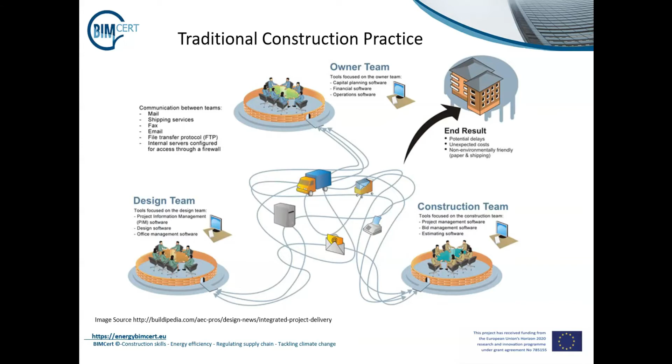This can result in data loss as well as poor communication, and this data may never be recovered again.

Also, through the use of different softwares, there are interoperability concerns, which means that one software may not be able to process another software's capabilities, and therefore there is important data loss in the exchange of these softwares.

Data interoperability addresses the ability of systems and services to create, exchange, and consume data. There is a need for clear expectations for the contents, context, and meaning of that data. The National Institute of Standards and Technology suggests that inadequate interoperability of buildings has resulted in $15.8 billion annual costs within the US.

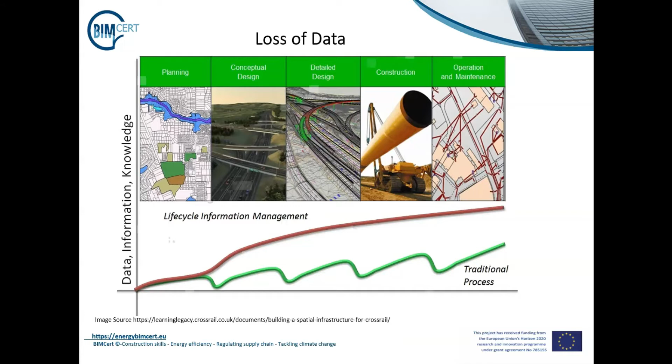So just to recap, some of the common concerns with the traditional construction process include adversarial and fragmented processes. This is a result of different stakeholders working to deliver their part of the project, and they may not be aware of other deliverables and data associated with those deliverables. Due to variations and cost overruns, it may create an adversarial and fragmented environment.

Little time spent at the design development. Due to the expense associated with the design, it can be difficult to explore variations due to the cost to do so. Poor site construction planning. It can be difficult to plan activities on site through 2D drawings, and therefore sometimes design intent is not fully understood, as well as little time spent in energy assessment or impact.

The use of sophisticated energy analysis tools would not be common during the traditional process, as a number of variables are required, such as materials and orientation, in order to fully understand how energy analysis can play a key role. This is where building information modeling can play a key role, as the model itself can be used to advance this process.

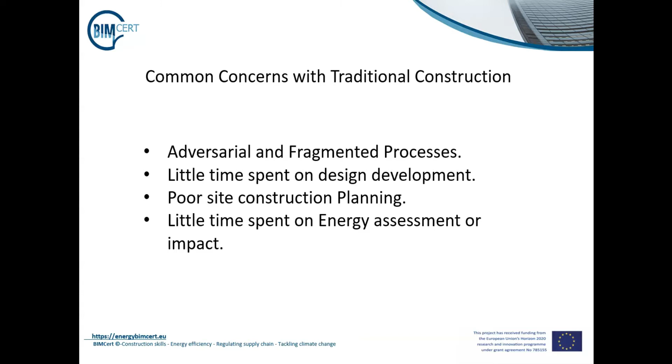An interesting fact is that any improvement in productivity and successful adoption of modern innovative processes will have a major impact. For example, a 1% rise in productivity worldwide could save $100 billion a year, according to the World Economic Forum.

So if we look at this from a smaller scale, by using innovative processes such as BIM, augmented reality, virtual reality, modular construction, amongst others, on a school project worth $2.5 million, we could easily save $25,000 by applying these innovative products.

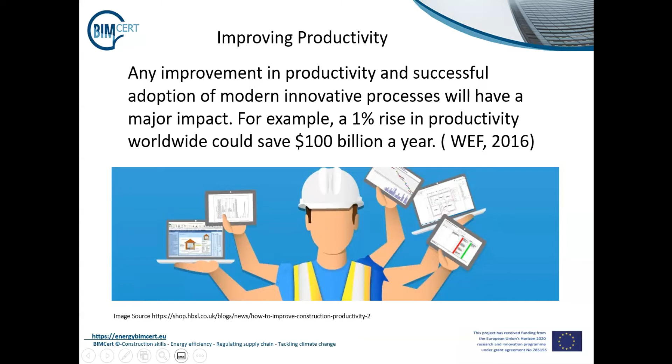As we have highlighted, there are a number of concerns with the traditional construction process. So what we will do is we will look at these in more detail, and importantly, we will examine how building information modelling can be used to address a number of these concerns.

First concern is adversarial and fragmented process. The construction industry is often described as being adversarial. That is, it frequently involves conflict, opposition, confrontation, dispute, and sometimes even hostility.

So how can BIM help with this? Well, BIM technologies can foster a more rewarding collaboration process, as the design team can work from a synchronized model within a common data environment in the sharing and recording of information. Markups can be performed online, and design changes can be implemented faster.

BIM not only allows design and construction teams to work more efficiently, but allows them to capture the data they create during this process, which can be used to inform operations and maintenance activities. This information provides a historical database for the asset, which can be used to inform the client's facilities management team.

BIM can also be used for clash avoidance. Potential issues can be highlighted before they happen on site, therefore removing potential confrontation. Access to a common data environment through the cloud will also mean that the team can have access to real-time information.

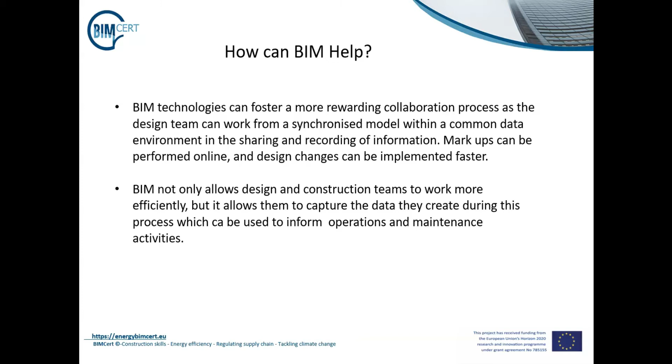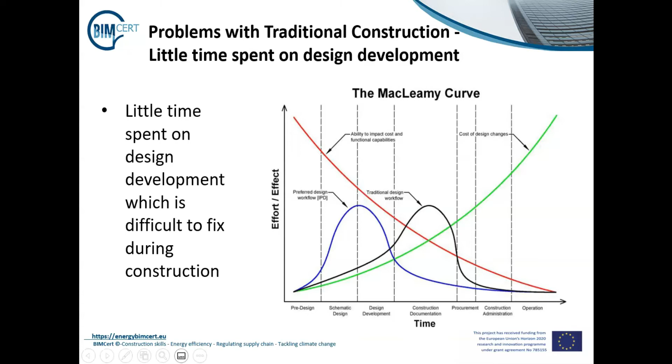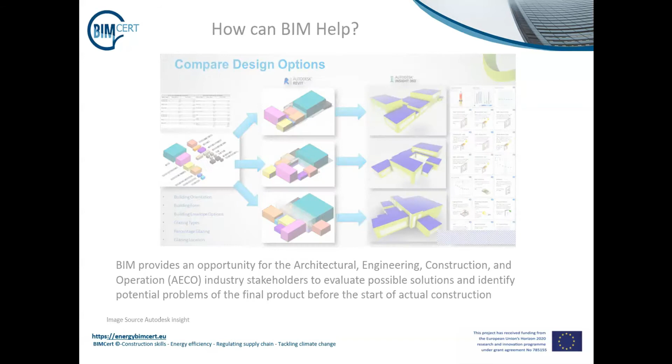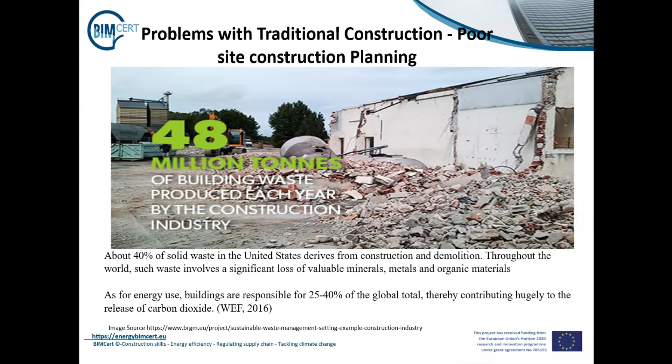Poor site construction planning can result in unneedful waste, which has had a severe impact on the construction sector. About 40% of solid waste in the United States derives from construction and demolition. Throughout the world, such waste involves a significant loss of valuable minerals, metals, and organic materials. It's also important to include other wastes such as time and energy. As for energy use, buildings are responsible for 25 to 40% of the global total, contributing hugely to the release of carbon dioxide. With a growing population and reduction of natural resources, it's key that waste be kept to a minimum and that we embrace more beneficial methods such as building information modelling, amongst other digital innovations.

So how can BIM help with waste management? The model can help with advanced material management techniques. The 3D model can be used to view what materials are inside, where they are located, and when they were ordered. The model, in partnership with BIM principles, can be used to order materials just in time to ensure that no excess materials are ordered or that materials are on site that are not required.

Clash detection: a clash occurs when components that make up a built asset are not spatially coordinated and conflict. In a BIM process, these clashes can be spotted more easily during the design phase of a project, ahead of work starting on site. With regards to traffic analysis, the model can be used to view site constraints and perform detailed traffic pattern analysis to understand the best route, providing minimum impact on surroundings. What-if scenarios can be performed to ensure a number of actions are trialed before they are realized on site and cause potential impact.

Data can be streamlined, and this data is available in real time, so everyone can be ensured they are working from the most up-to-date drawings, therefore reducing mistakes and reducing rework.

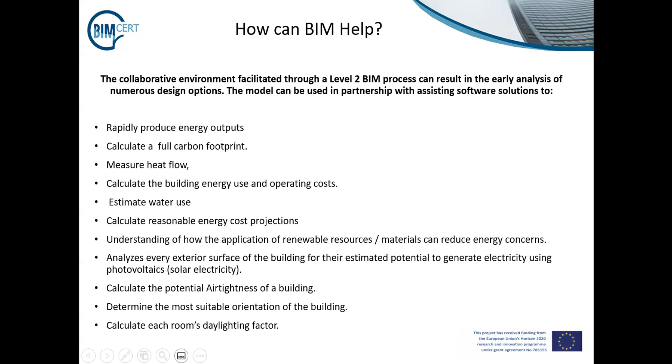This brings us to the end of segment 1 of 3 for learning outcome 1.3 in the BIM Principles training unit. A case study has been provided on the BIMcert platform. This case study investigates the traditional construction process compared to the BIM process and focuses on a company's journey of moving from traditional construction to a more BIM-related practice.